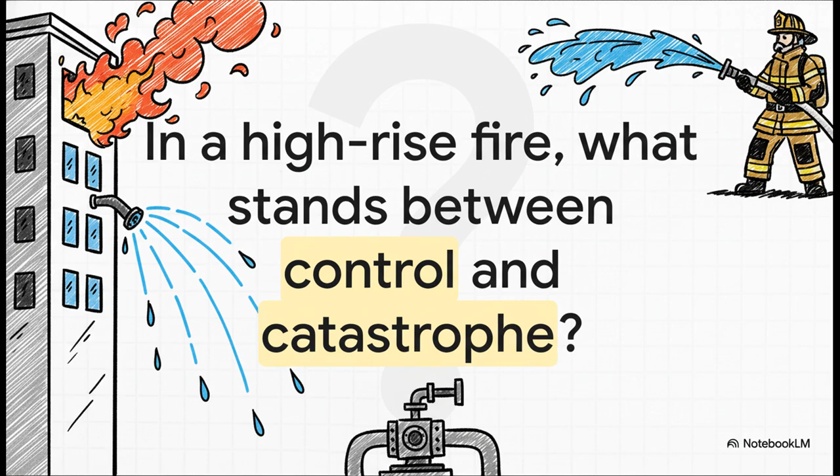Just imagine it for a second. The absolute worst-case scenario. A fire breaks out, maybe 20, 30 stories up. The sprinklers go off, the firefighters show up with their hoses. But what is the one thing that both of those need to actually work? What stands between getting a handle on it and a total disaster? You got it. It's the fire pump system.

This thing is the powerful, beating heart of the building's defenses, designed to shove massive amounts of water exactly where it needs to go, right when it's needed most. But how do you know it's going to work? Well, that's what commissioning is all about.

You know, every single one of these life-saving systems, it doesn't start with pipes and motors. Nope. It starts with numbers. Before anyone even thinks about turning a wrench, engineers have to sit down and do the math, calculating the exact demands of that specific building.

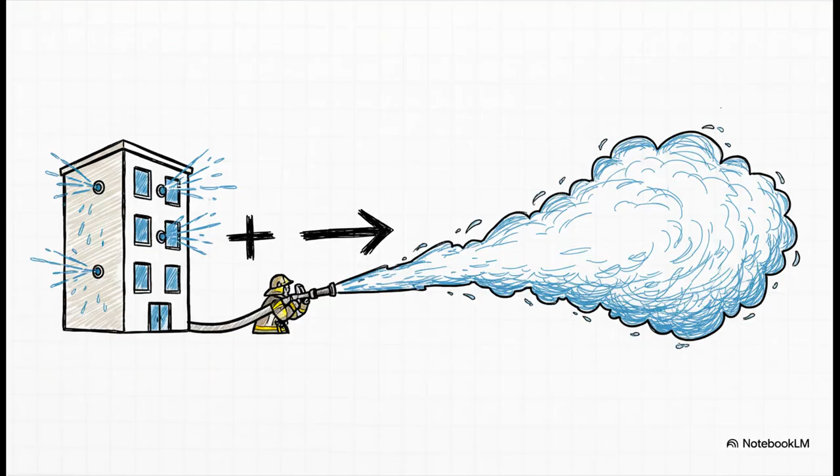The very first calculation is all about flow rate. The system has to supply all the building sprinklers at once, which in this case is 1,500 gallons a minute, plus it needs to have enough left over for the fire department, another 500 gallons per minute for their hoses. So you add it all up, and you get our target, a whopping 2,000 GPM, or gallons per minute.

Okay, next up is pressure. The pump has to be strong enough to push all that water straight up, fighting gravity the whole way. It's also got to overcome all the friction inside hundreds of feet of pipe and still have a good safety margin at the end. For this particular system, that magic number is a minimum of 80 psi, or pounds per square inch.

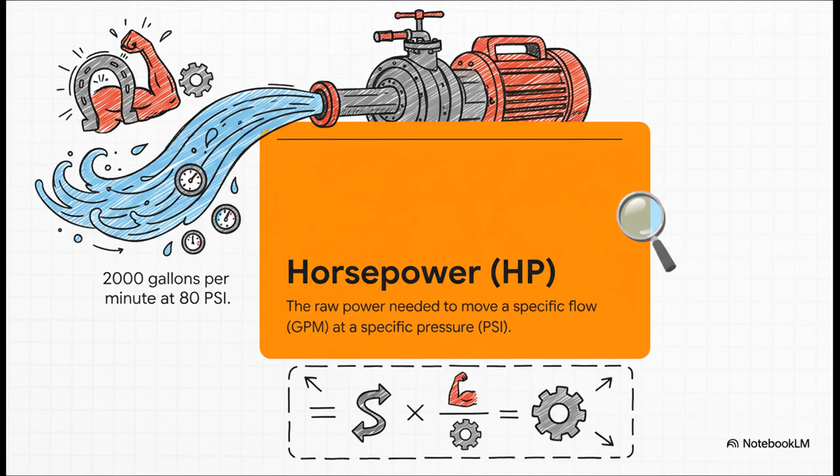So how much muscle does it actually take to move 2,000 gallons of water every minute at 80 psi? Well, that's where horsepower comes in. It's calculated using a specific formula that basically connects the dots between flow, pressure, and the pump's own efficiency. So you plug in our numbers, you run the math, and the calculator spits out that we need about 132 horsepower.

Now, you can't just go out and buy a 132 horsepower pump. They come in standard commercial sizes. So the designers just select the next size up, a nice robust 150 horsepower motor. And just like that, the blueprint is complete.

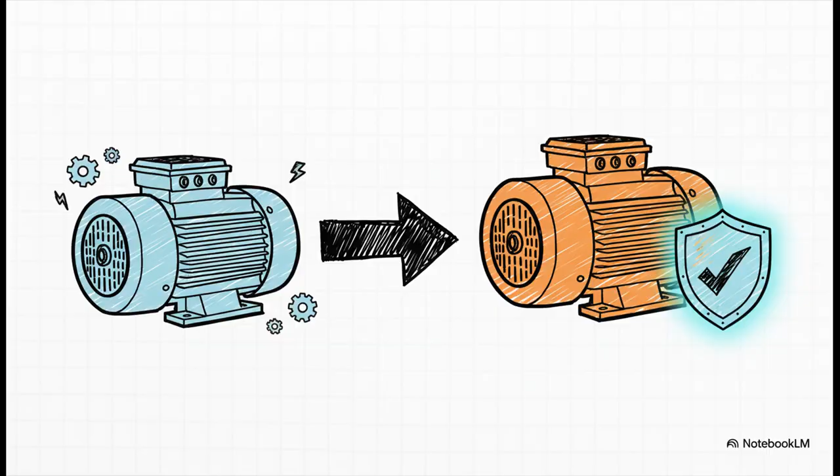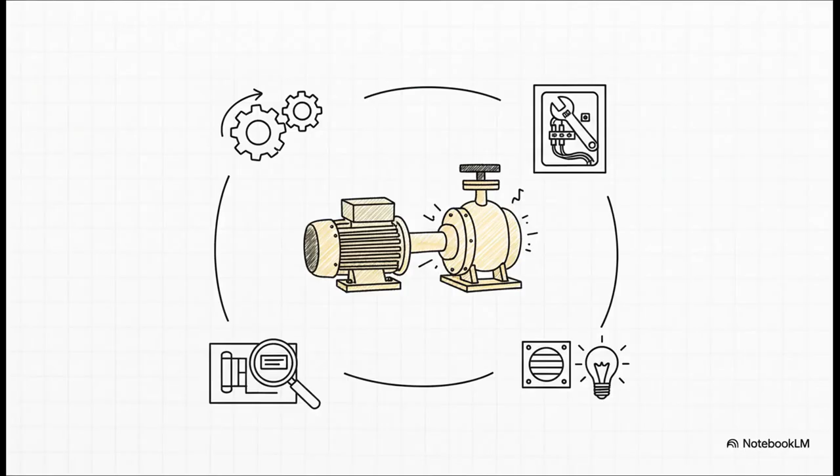With all the components installed, we move to our really critical phase, the pre-power checklist. This is a super meticulous, hands-on inspection to catch any physical problems before a single volt of electricity is applied to the system. Skipping any of these steps could be absolutely catastrophic.

We're talking about questions like, is the pump perfectly aligned with the motor? Are all the electrical terminals torqued down tight? Is the grounding secure? Technicians will literally check the serial number on the pump's nameplate against the approved drawings. This isn't just paperwork. It's about preventing a violent failure on the very first startup.

The physical checks are all done. Everything looks good. And now, for the moment of truth. This is the system's first breath, and it's a very carefully controlled sequence to bring this powerful machine online for the very first time. Yeah, they don't just flip a big switch and hope for the best. First, a small jockey pump is started. Its only job is to get the system up to pressure so they can check for leaks.

Then, the main pump is started manually, just for a second, to confirm it's spinning in the right direction and running smoothly. And finally, they simulate a fire by opening a valve, dropping the pressure. They watch and wait, making sure that main pump roars to life automatically, just like it's designed to do.

So the pump can start, that's great. But can it actually perform under pressure? Well, welcome to the system's Olympic trial. This is where the pump has to prove it can deliver on all those promises that were made back on the blueprints. The test is run at 3 critical points.

First is the churn test, with zero flow, which checks the absolute maximum pressure the pump can generate. Then comes the 100% flow test to verify its performance right at its rating. And finally, they push it to its absolute limit with the 150% overload test, just to make sure it can handle extreme demand without failing.

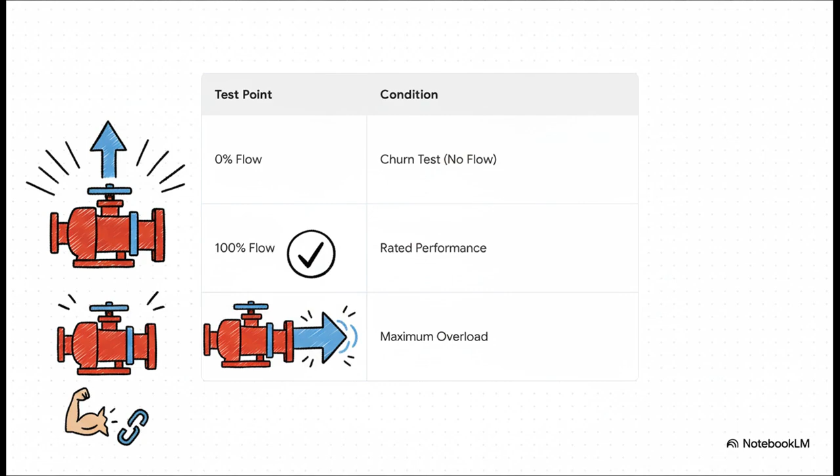And the ultimate pass-fail for this whole thing? It's actually really simple. Every fire pump ships with a certified performance curve right from the manufacturer. It's a graph that shows exactly how much pressure it should produce at any given flow. The results from the real-world test must match this curve. There is zero room for error here.

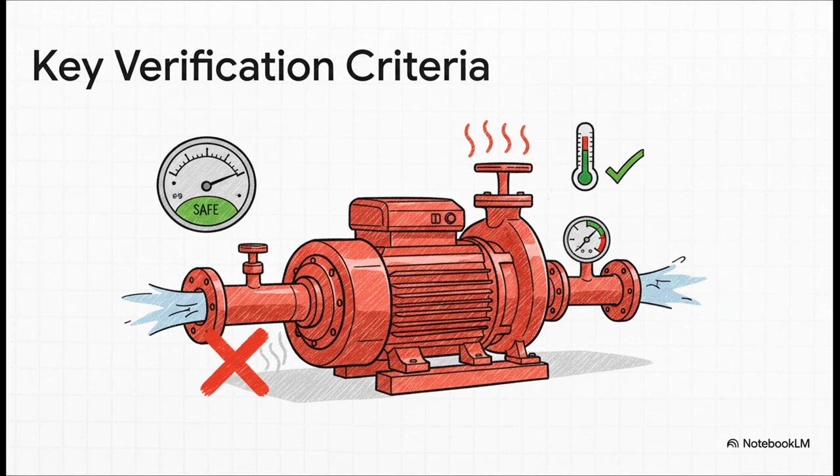But it's not just about pressure. The technicians are also monitoring the motor's electrical draw to make sure it isn't overworking. They're checking for any overheating, feeling for excessive vibration. They even watch the suction gauge to make sure the pump is getting a steady, uninterrupted supply of water. It has to be powerful, sure, but it also has to be stable.

The pump has passed its performance test with flying colors, so now we're in the final phase. It's time to test its communication with the building's other safety systems and get all the final documentation in order. A fire pump doesn't work in a vacuum, right?

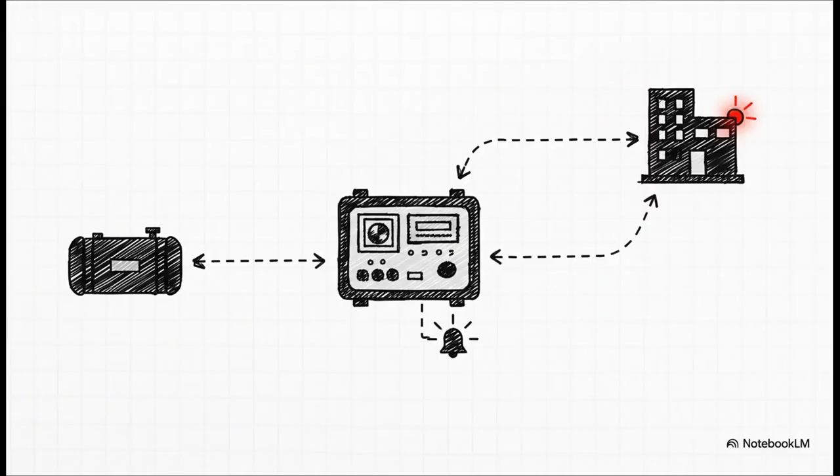A signal has to be sent to the building's main fire alarm panel the second it turns on. And just as important, it has to send a trouble signal if it fails. For systems with diesel backups, they test the low fuel alarms. This whole process ensures the building operators know the status of their most important life safety system at all times.

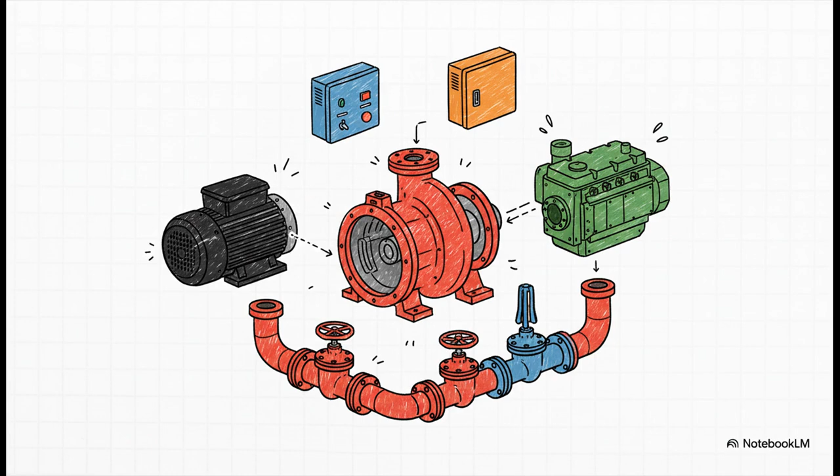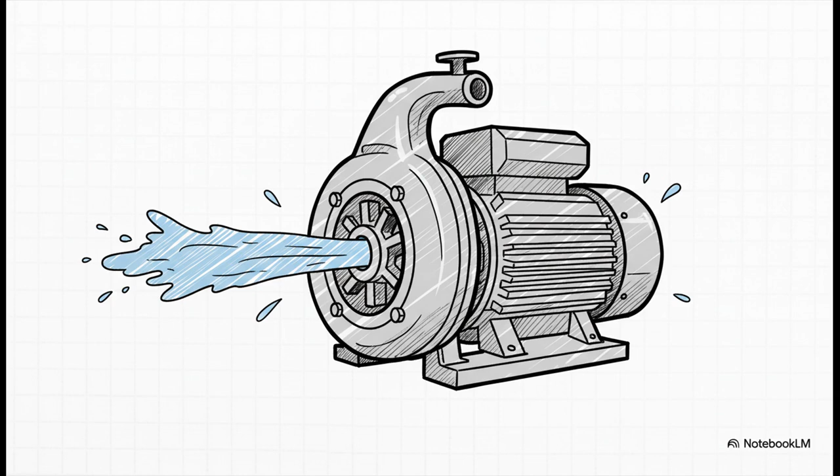So let's just quickly recap the core components that have now been fully tested and certified. Each one of these pieces plays a critical role in making the whole system reliable. At the very heart of it all is the main electric pump. That's the 150 horsepower workhorse we calculated way back at the beginning.

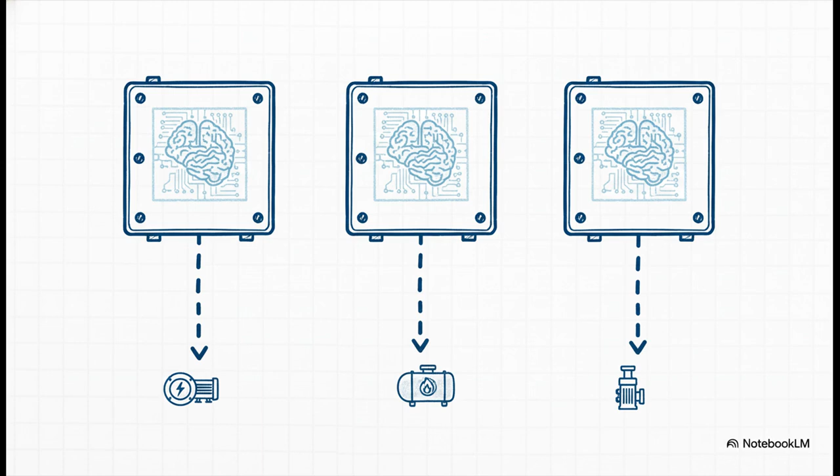But of course, power can fail in a fire, so an equally powerful diesel-driven pump stands ready as a critical backup. And managing them all? Those are the brains of the operation. A set of dedicated controllers that make sure the response is seamless and automatic, right when disaster strikes.

And tying it all together is all the essential hardware, the huge 8-inch pipes to carry that massive flow, the valves and gauges that control and monitor the pressure, and of course, the fuel tank that ensures the diesel backup is always ready to run.

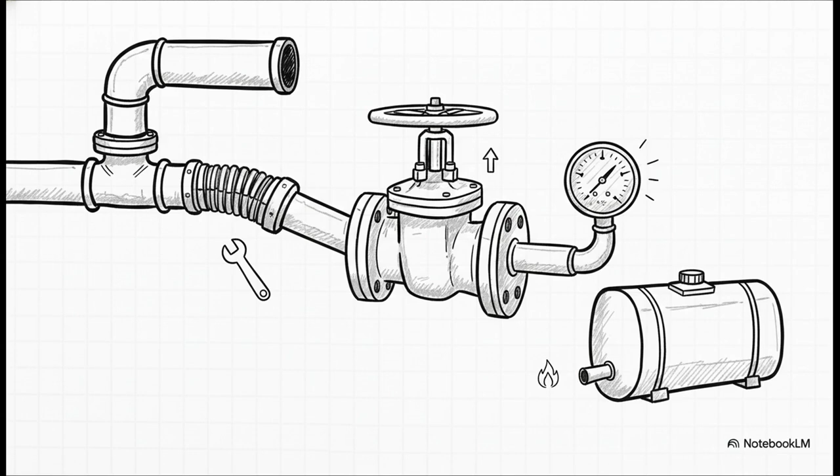And that's it. The journey is complete. Through meticulous design, very careful inspection, and some seriously rigorous testing, a collection of pipes and motors has been transformed from just a plan on paper into a certified, reliable lifesaver silently standing guard. This whole complex process is what guarantees the fire pump will work when you need it most.

It kind of makes you wonder, doesn't it? What other invisible guardians are built into the world all around us, tested and certified just to keep us safe?